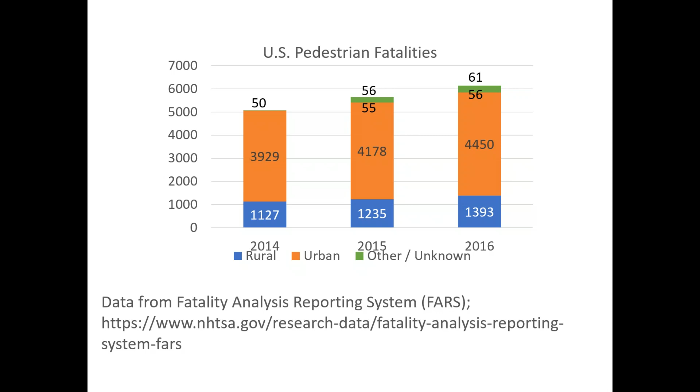Since 2014 — but first, before I get into that, let me show you a little bit more about the data. As I mentioned, it's a census of all fatal crashes. For pedestrians and bikes, typically they are at least one of the people killed in crashes that they're involved in with motor vehicles, so most often they're the most severely injured person.

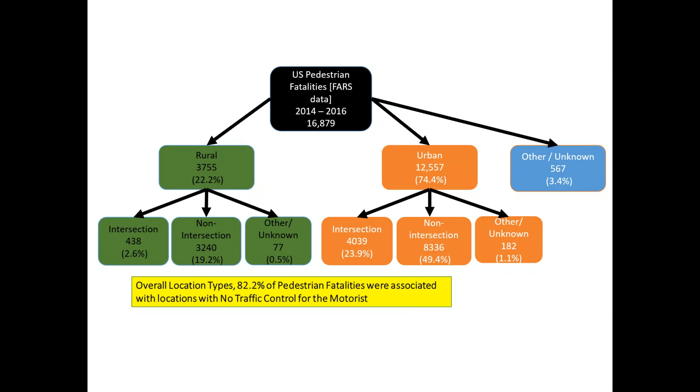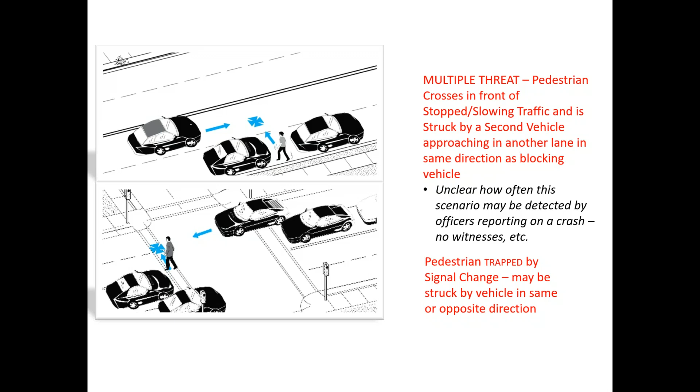For both of these, especially multiple threat, it's really unclear how often this scenario can be detected by the officers reporting on crashes, if there are no witnesses to what happened. Maybe it's at night, these hit and run situations. It's just unclear if this is being captured well in the data.

Other similar types with similar risks, especially at multi-lane crossings, are dart outs, which can also be from behind a parked car or other objects. That's very similar to a multiple threat situation, and it could also occur at a mid-block crossing, especially if parking hasn't been pulled back from that location.

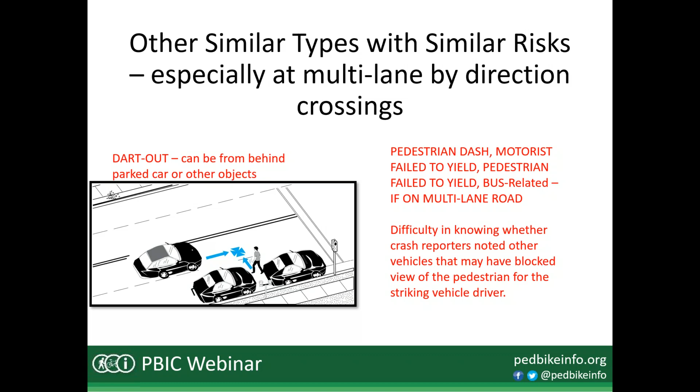Others are pedestrian dash, which implies that the pedestrian suddenly ran into the street. Motorists failed to yield, pedestrian failed to yield types - basically these are crossing path types of conflicts, even if we don't know who yielded right away or who didn't yield in all circumstances. Bus related crashes - a bus could set up a multiple threat situation if you have transit stops in a segment, and the view is blocked by the bus. So it's really rather difficult to know whether crash reporters are noting this situation where other vehicles may have blocked the view of the pedestrian for the striking vehicle driver.

So again, here's a summary of the data from the U.S. fatality data that we've been looking at. For all of those crossing types of crashes and all U.S. fatalities in general, we identified only 57 that the coders could clearly identify as a multiple threat type of crash, and only 14 for the trapped type of situation.

So with those caveats, the next table will show you some of the factors that we did look at in relation to multi-threat and other types.

Okay, so basically we took all of the crashes for the multiple threat and other crash types and looked at the relationship to a number of other factors. Now, I should say that the intersection ones are coded from the PBIC coders, and they determine that information from all the information available on the crash report - the image, the narrative, and so forth - as well as what the police officers said about the crash.

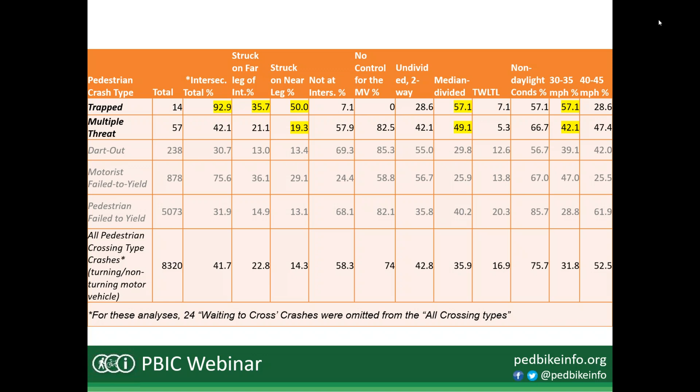One of the other issues we took a look at, the coders have been coding a more detailed scenario on which leg of an intersection crashes occurred on. Was it from the motorist perspective? Was it the near leg, the first leg they crossed, or the far leg as they went through the intersection? So we saw that multiple threat was a little more highly represented on the near leg, whereas trapped was more highly represented on the far leg. They were more likely to be struck in the far crosswalk as the motorist went through an intersection.

So just in summary, multiple threat and trapped crash types appear to be a low percentage of both fatalities and total crashes, although we know that North Carolina may not be representative of all states. It does have urban and rural areas that we looked at there. So it isn't known whether reporting issues affect the numbers.

Most multiple threat fatalities occur, though, at non-intersection locations. A lack of traffic control, I should have highlighted this in the table before, is overrepresented in multiple threat fatalities, even more so than for all crossing types of crashes. The median divided roads also seem overrepresented, as we mentioned. And again, better data on numbers of lanes and environmental circumstances might help us to better define this type of crash.

We didn't detect—although we know that light conditions, darkness or non-daylight conditions are really highly represented for pedestrian fatalities—this crash type in particular didn't seem to be overrepresented for nighttime crashes. So it may be that it is more of a situation where it occurs, and this is speculation, but it may occur more during congested hours, which tend to be more daylight conditions, because slowing traffic may be more inclined to stop and wait if they're waiting maybe to get to an intersection and make a right turn and such. But then the other lane is free flowing. Right, so it can be a dangerous situation. It's just that we're not sure how well we're capturing it in the data.

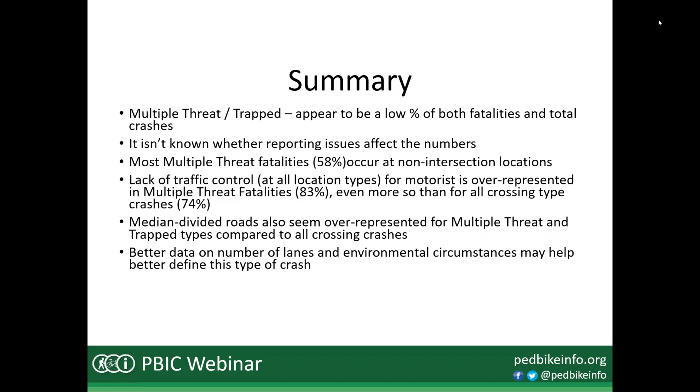So like you said, is it a problem with the reporting, or are the numbers just really low? I think we can clearly see some of the factors that may contribute to this crash based on what you just shared with us, and then what Mike Cynecki will be talking through in a bit. So let's move into Mike's presentation, and then we'll come back at the end for some more questions and explore this data issue a little further.

Mike, I'm going to start with your slides here, please take it right over, and I'll advance for you. Okay, my name is Mike Cynecki, as Dan had said earlier. In my 26 years with the City of Phoenix, the multiple threat crash was one of the most challenging to address, and it also involved some of the more severe crashes. Why don't you go to the next slide?

One of the reasons why you'll have multiple threat crashes occur is on streets. People like to live on low volume streets with very little traffic. But if you have a large community, you've got to find ways to move traffic around. Since most of the other streets are minor and discontinuous, you'll have these big major streets that are multi-lane, where a lot of the traffic has to move, and that's where our crashes are occurring.

I agree with what Dan had said earlier: a lot of the multiple threat nature of the crash is not getting captured, recorded, or computerized. You have to read the report to understand how the crash is happening, or look at some of the details. In some cases, the details are not provided, so you can't really tell what's happening. But I'm going to speak about 5 factors associated with multiple threat crashes.

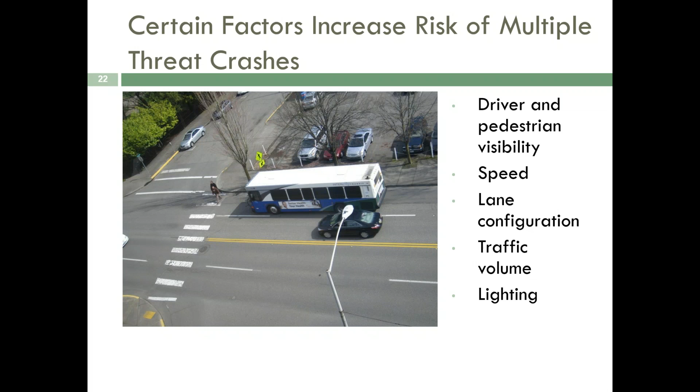One is driver and pedestrian visibility. The second is speed. Third is lane configuration, and the number of lanes is very important, associated with traffic volume, which is the opportunity for a multiple threat crash. And then, how lighting may impact that. Go ahead, Dan, next slide.

The multiple threat crash problem occurs, as this slide shows, when a vehicle stops at a crosswalk and creates a visual screen for the car in the adjacent lane. It doesn't have to be the curb lane; the pedestrian could be crossing the other direction. In many cases, the driver of the vehicle approaching from behind doesn't understand why the motorist is stopping and will pass them, even though, as we'll discuss in a few minutes, it's against the law to do so. It could be a motorist in an adjacent lane or one behind the stopping motorist who goes around them. They have no idea what's there.

The pedestrian similarly could have a visual screen. However, we have always tried to tell pedestrians that they have a blocker, so crossing one lane at a time is a way for them to overcome the situation. But many times, psychologically, when they see one vehicle stop, they feel everyone is stopping. And in many cases, drivers out there have a lot of distractions. It's not good - drivers are talking on cell phones, talking to each other in the vehicles, looking at maps trying to find their way around. They don't have their mind on what's going on.

Go to the next slide.

This shows an excerpt from the Uniform Vehicle Code 11-502, which says whenever any vehicle is stopped at a marked crosswalk or at any unmarked crosswalk at an intersection to permit a pedestrian to cross the roadway, the driver of any other vehicle approaching from the rear shall not overtake and pass such stopped vehicle. Everywhere I've gone, state laws have that provision regarding right-of-way at crosswalks. Wording may differ slightly, but virtually every state prohibits a motorist from passing a vehicle stopped at a crosswalk.

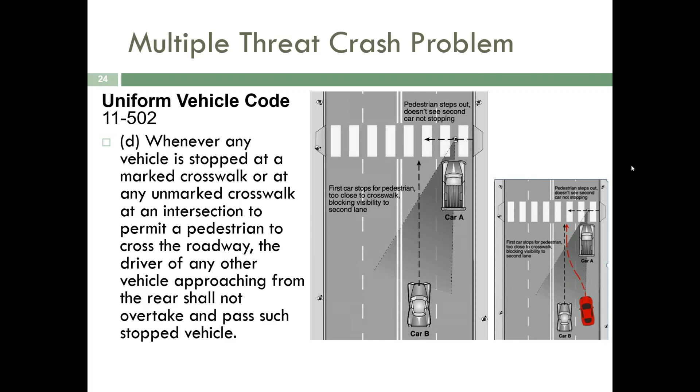So what are some of the problems of multiple threat? Not only could it be from a stopped vehicle, it could be from a parked vehicle. In this case, the pedestrian standing at the curb would not have a good view of oncoming traffic. Solutions can include putting in curb bulb-outs so the pedestrian is standing in a secure spot where they can see beyond that parked traffic. So the multiple threat can be traffic stopped in the street or traffic parked along the roadway, and we have to look for those locations to make sure pedestrians have good visibility and traffic has a better opportunity to see them.

In some cases, the visibility issue is referred to as providing daylighting or open visibility. One thing I want to point out is that a bike lane can provide a lot of benefits, not only space for bicyclists, but also separation that helps promote better visibility for drivers and pedestrians waiting to cross. Also note that visibility problems can come from a median island - if you're planting big trees along the street or in the median. We had a case years ago involving a skateboarder going through a median with a big ocotillo plant that, during certain times of year, leafs out and you cannot see beyond it. Our solution was to relocate that ocotillo to a spot where it wasn't creating a visibility obstruction. So plants along the roadway intended to do good, as well as parking, can create this problem where you don't have the clear view between the approaching driver and a pedestrian waiting to cross - and it's not just at crosswalks, it could be anywhere along the street.

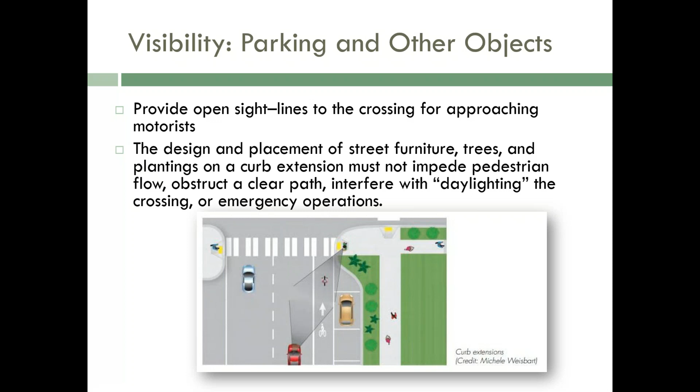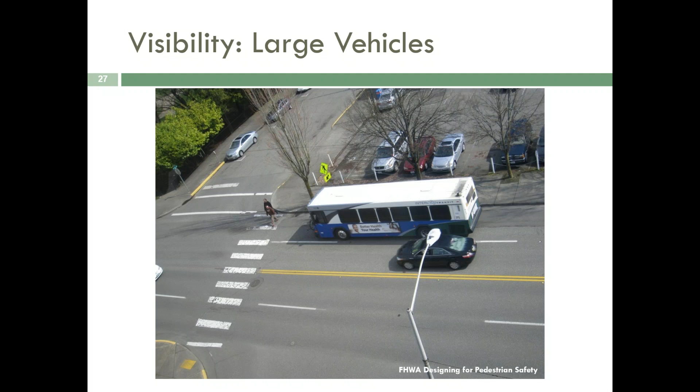Visibility obstructions also occur with larger vehicles, trucks or buses along the road. Again, the pedestrian has a great blocker there that lets them cross one lane at a time, but it creates a really difficult visual screen for the motorist approaching in the other moving lane.

Here's a case where you can look at it from the pedestrian's perspective - once again, the pedestrian cannot see beyond the bus. Buses really shouldn't be stopping on the approach to uncontrolled crosswalks; they should be far side, but there may be reasons you can't, because of ADA access or because the bus is turning the corner. In most cases, buses create such a visual screen that they should be put on the far side of intersections. And once again, there's that psychological condition where the pedestrian presumes all the other motorists see them and will stop for them, and that typically doesn't happen.

Another case happens when a bus passenger wants to catch a connecting bus or is in a hurry - they may jump off the bus and quickly go into the street in front of the bus, where the driver doesn't have a chance to see them.

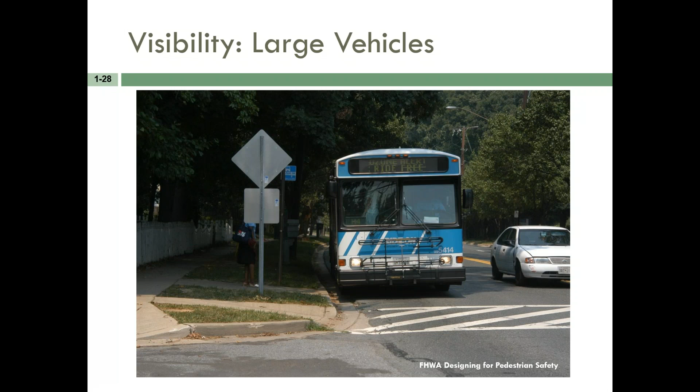Another issue is that our multiple-threat crashes typically occur on our higher speed streets. We have a lot of 40, 45 mile an hour streets within the city limits, and those conditions are more ripe for higher impact speeds and a higher difficulty to avoid a crash.

When we talk about speed, we're going to be talking about a couple of different things. First, the ability for drivers and pedestrians to see each other, the ability for the driver to react and avoid a crash, and speed's major impact on crash severity.

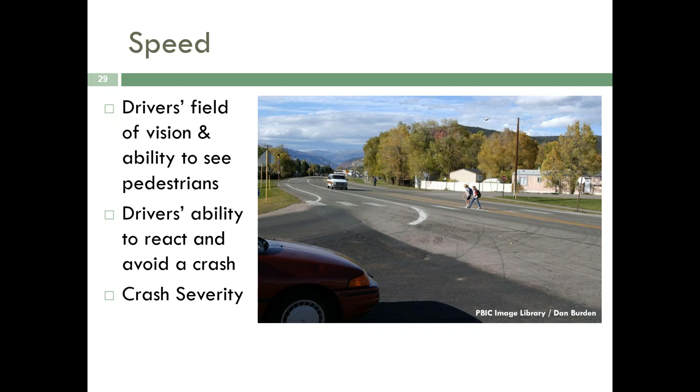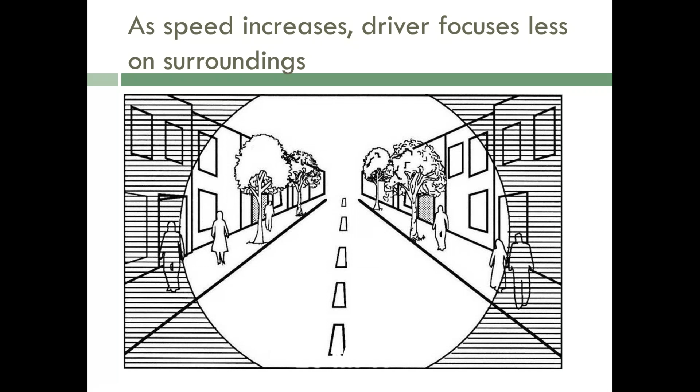As the speed increases to 25, you're looking even further down, and of course at 30 miles an hour. Imagine streets going 35 or 40 miles an hour—you're not seeing the periphery, you're looking far ahead because you have to react, and it takes a much longer distance to react to conditions down the street. So the driver's cone of vision and where they're expecting issues to occur is further down the road, not to the right and left as pedestrians cross.

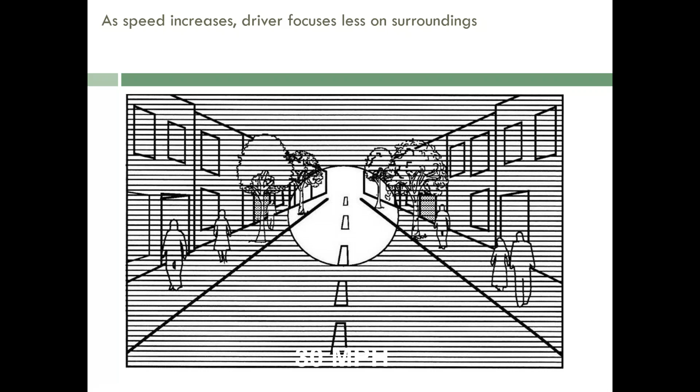This is a chart we use in the Designing for Pedestrian Safety courses, showing how speed affects crash avoidance and your ability to stop. At 40 miles an hour, the distance it takes to perceive, react, brake, and bring your vehicle to a stop is almost a city block. That's a long time, and we have our greatest difficulty warning drivers for crash avoidance on higher speed streets because it takes so much distance to bring that vehicle to a stop. Even on a 20 mile an hour street, you're looking at 100 feet to react and avoid a crash.

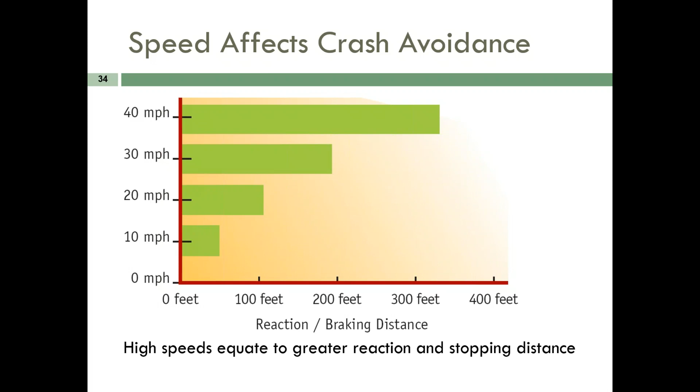So that is one major issue.

The other major issue is what happens when you have an impact at various speeds. This slide indicates the impact speed and the chance for a fatality. This is for an average pedestrian—if you have an elderly pedestrian, the chance for a fatality is far greater. And what this figure doesn't show is that those who survive the crash may have long-lasting and severe injuries for the rest of their lives. So one way we can minimize the chance for a fatality or severe injury is to get vehicles to go slower and slower.

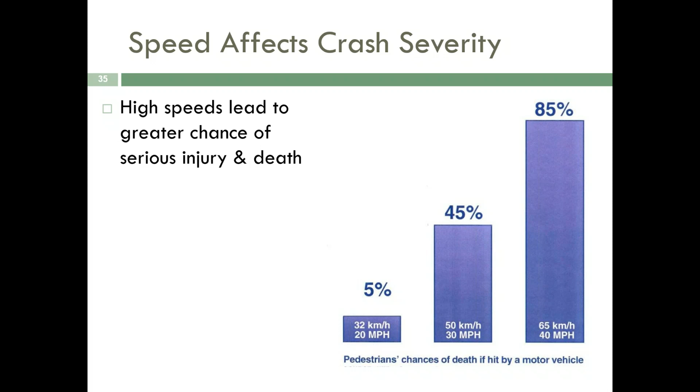Much easier said than done.

We also have long crossing distances, which create challenges especially for younger or elderly pedestrians: a longer exposure to traffic, greater conflicts, and greater vehicle delay. That's because at traffic signals with big wide intersections, people are always trying to add dual left turns or right turn lanes. These big intersections often have their clearance times dictated by signal timing based on pedestrian clearances, meaning longer cycle lengths and greater vehicle delay. And of course slower pedestrians need much more time to cross the street.

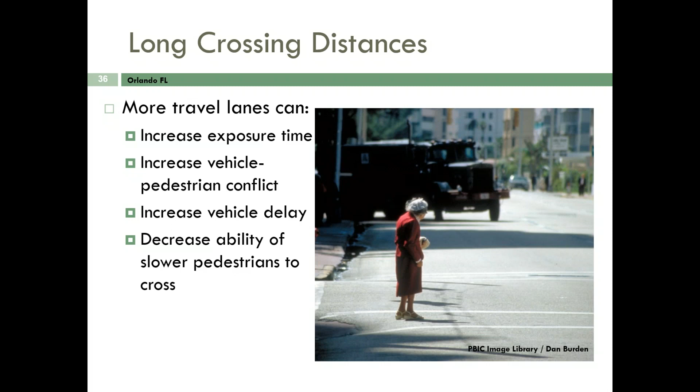Again, when you take a look at streets like these and add traffic volume, you add the opportunity for crashes. I remember when Charlie did his big study on marked and unmarked crosswalks—he called me, and I won't mention the agency I used to work for, but he said that particular location had the highest number of crashes.

That location had 4 lanes in one direction, 3 in the other, and a center two-way left turn lane, 84 foot from curb face to curb face, and a marked crosswalk. On one side of the street we had an apartment complex. The other side had a daycare center and a grocery store.

Since then we've gone back, reduced a lane, and done some other crossing treatments to make it much easier to cross. But that was one of those types of conditions that really shouldn't have just gotten a marked crosswalk expecting that to resolve your pedestrian safety issues.

The wider the streets like this and the more traffic you add, the more opportunity for crashes. The other thing to mention is traffic congestion: drivers who are frustrated because they're caught in congestion, or caught at 3 cycles at the last signal, are less apt and likely to stop. So the more congestion you create, the less likely they are to want to stop mid-block or at other locations along the route.

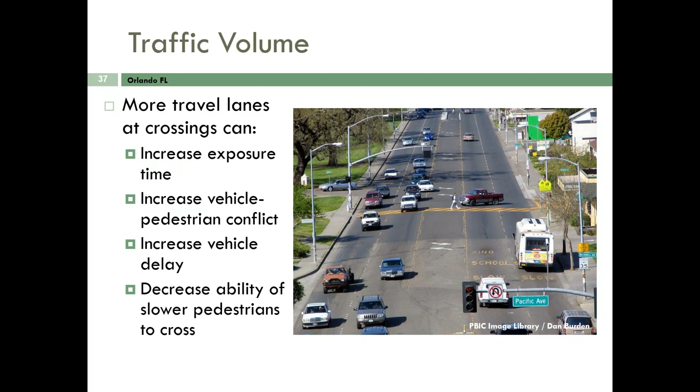Go ahead to the next slide.

Another factor is illumination for nighttime crossings. When you designate your crossings, make sure you have lights there, because lights really help light it up. We've had situations where crosswalks were put right in between lights along a continuously lit route—that would be the darkest spot. You want people to cross at the lightest spot, and that has a big crash reduction factor.

Now, the crash reduction factors listed here are just for those crossing at night—it's not your total crashes, but your nighttime crashes. You'll see a disproportionate amount of pedestrian crashes occur during the nighttime hours. Next slide.

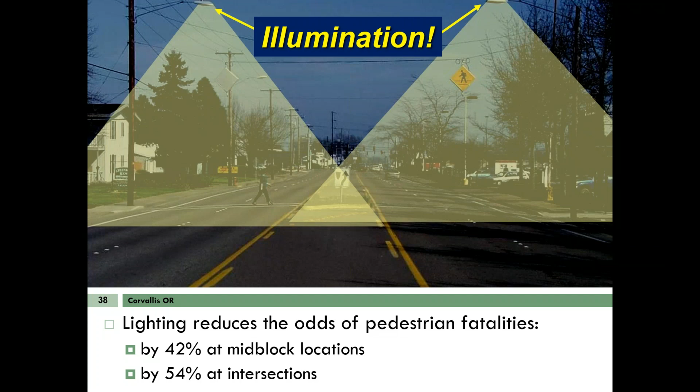I believe this is my last slide. The one other thing about lighting: the old way of doing it, in this mid-block example, was just putting it on one side of the street. The better way is to try to put lights on both sides so you have uniform lighting, and put the light in advance of the crosswalk—it doesn't have to be far in advance, 10, 15 foot in advance.

As opposed to having the light above the pedestrian, which creates a silhouette effect, when you have it in advance of the crosswalk you're lighting the pedestrian, you can see colors better, and as a result you can recognize things better. About 20 lux, or 2 vertical foot candles, at about 5 foot above the pavement, is the desirable lighting level for your crossings.

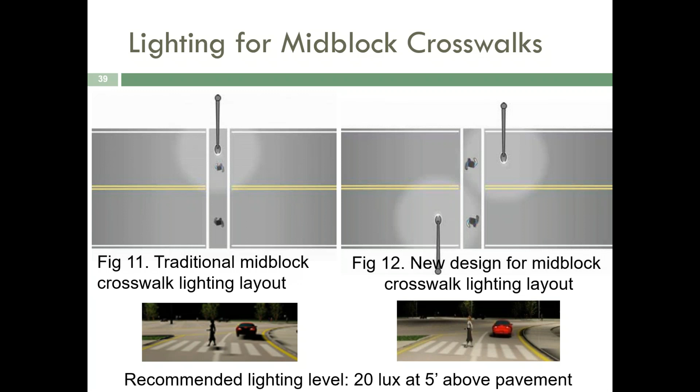This is a simple 2-lane crossing example. Just imagine for a wider street where you want to get the lights out over the roadway and slightly in advance. I believe that's all the slides I have, and we're going to move on to Charlie to talk about some of the solutions for the multi-lane crossings.

Great, thanks so much, Mike. That was an awesome review of all these different factors that could be contributing to this problem. I'm sitting across the table from Charlie Zegeer right now, and as you mentioned at the outset, you've had some history with Charlie on this topic.

Charlie's devoted a lot of his career to understanding and improving safety at uncontrolled crossings. So Charlie and I are going to go back and forth through a few strategies that we see as some of the things we could be doing better at uncontrolled crossings. We'll finish with recommendations on how to know which options belong where, sharing more recent guidance, and then wrap it up. Then we'll move on and George Branyan will share some perspective from DC.

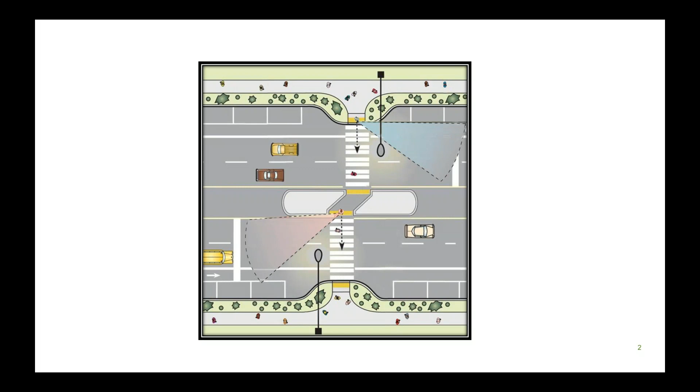Compared to some of the images Mike just shared, we've got a pretty nice looking scenario, all things considered, for a multi-lane crossing here, compared with other locations without these treatments. The question is: what does this crossing have that those other locations didn't? You can identify a few things—efforts to put the pedestrian in a better visible position, shorten the crossing with things like bulb outs, and medians and protected refuge areas to help break up longer crossings.

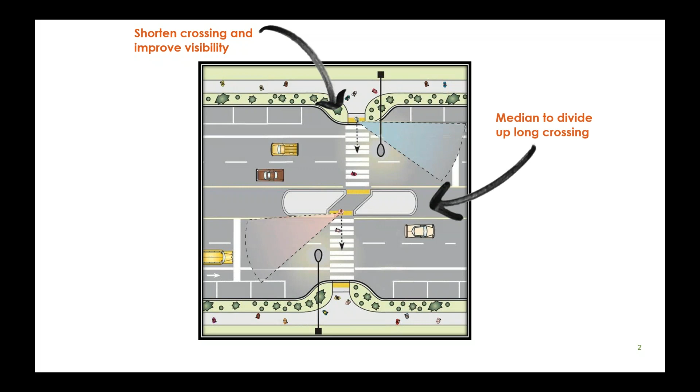These advanced lines, stop lines, yield lines, get drivers to stop further back from the crosswalk, as well as any additional lighting signals, beacons, things that you can do to really reinforce yielding behavior.

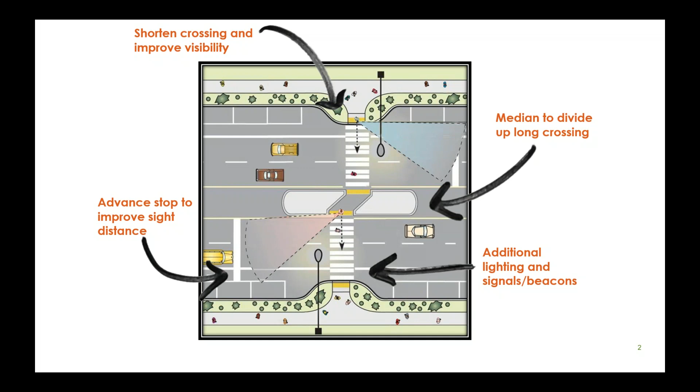We're going to talk about all of these today in a couple of different categories. Some of them intended to really address visibility and conspicuity issues that Mike raised, others to really reinforce safety by improving yielding rates at crosswalks.

We're going to try to accomplish several objectives to get at some of the causes of the crashes. In fact, when you often look at pedestrian crash reports, it's not uncommon to see that the driver involved, when asked why they hit the pedestrian, will say the pedestrian came out of nowhere. Oftentimes that just means the driver didn't see the pedestrian until the last minute, so that might be a clue that it was a multiple threat crash.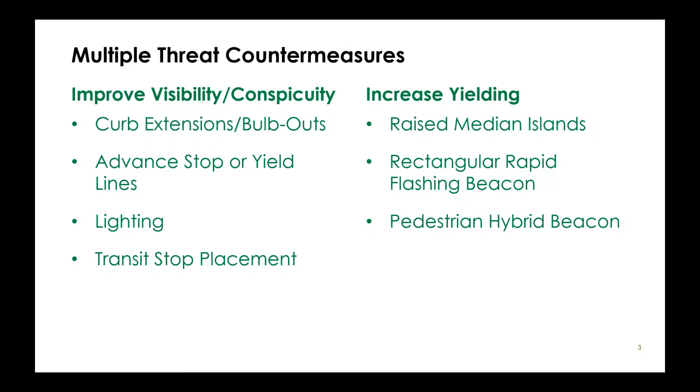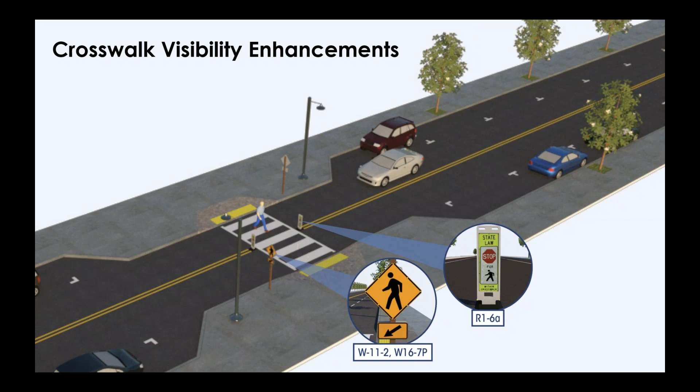Great point. There's this package of crosswalk visibility enhancements, Charlie, that you promote. This is from the STEP, Safe Transportation for Every Pedestrian Guide, which we'll get into in a minute. Some of the things packaged here in visibility enhancements, one of those being this curb extension or bulb out.

Mike Zanecki shared this slide, but what you're doing here is really putting that pedestrian in a more visible position, opening up those sight lines so the pedestrian can see oncoming traffic and can be seen.

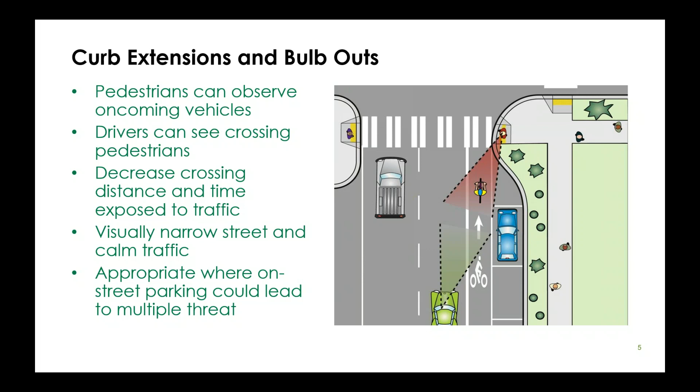Having a curb extension or bulb out can also reduce the speed of the right turning vehicle. So if a pedestrian is crossing from the bottom to the top of the screen here, that green vehicle making a right turn will more than likely make it at a much slower speed, increasing the pedestrian's chance of being seen and not struck.

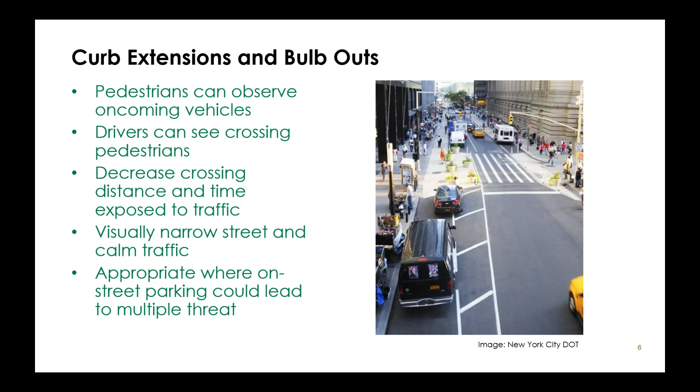This is really more realistic in locations with on-street parking. Obviously, you can't extend these into a full lane, but it reminds us that on-street parking can contribute to the multiple threat case. It's not just a vehicle that stops or yields, it could be any obstruction there, so putting pedestrians into a more visible place.

I think dwelling on advanced stop and yield lines as a countermeasure is really important because, as we'll see, depending on the money you're investing in this treatment, the benefit you get is pretty substantial. So we can explore what that does.

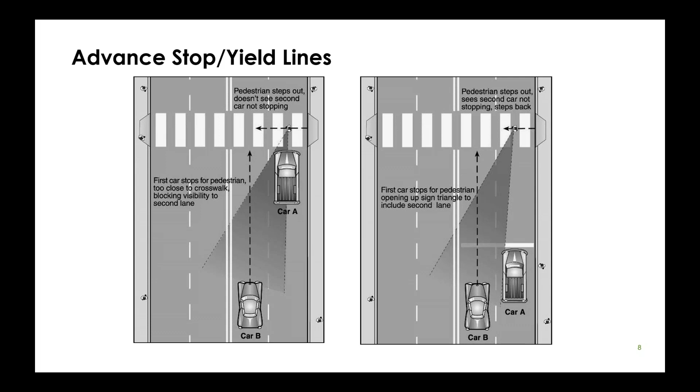There's guidance available out there depending on the speed and the lane configuration for how far back from the crosswalk you should place these, and some states are stop states and some are yield states, which depends on the marking and signage. But bottom line, by pulling people far enough back from the crossing, it'll open up visibility a bit more. For higher speed approaches in particular, you may want to place the stop line or yield line more like 50 feet back, and as speeds get lower, you can inch closer to the 20-foot distance. That's a factor, along with the number of lanes.

So you want to consider this advanced stop or yield marking with all of your established marked crosswalks, but then go out and observe. After you've installed a designated crossing with some of these supplemental treatments, make sure you're observing what's going on and that it is functioning properly.

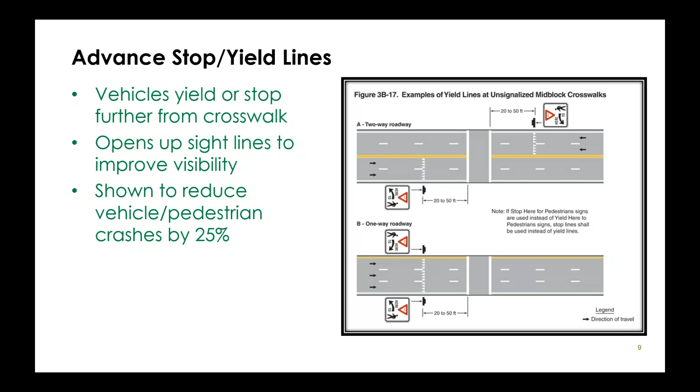The thing that jumps out to me is the 25% reduction based on research in pedestrian crashes that can occur after these go in, and that's even without another accompanying treatment. Obviously more successful if there's something else done as well, but that's a pretty good reduction, and for a fairly low cost compared to something like the RRFB or the pedestrian hybrid beacon.

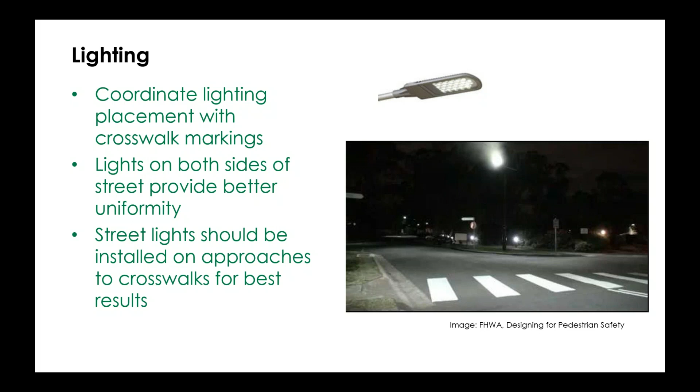Lighting, Mike mentioned this. We won't go into too much detail, but it's important. If we're talking about multi-lane corridors, great distances from one side of the street to the other, and if you've only got lighting on one side of the road, that'll be insufficient for illuminating the entirety of the crosswalk on both sides. Thinking through placing the lighting, coordinating with the crosswalk locations, as opposed to just placing them at set intervals - when that coordination isn't done, you're not always going to have lighting where you need it, at the crosswalk locations. We realize that agencies don't have unlimited funds, but certainly where you're having pedestrian crashes and or complaints occurring at night, these are the highest priority crossing locations to consider overhead lighting.

Mike, I might bring you back in right here. We did get a question about lighting that I wonder if you can answer for us, and that's what preference do we have in terms of the type of lighting for using at crosswalks? For example, an LED or some other type. Is there sort of clear and set guidance on this?

The preference is for LED lighting, for a couple of reasons. First of all, if you get the whiter light - it's actually a blue light that they refer to, but it looks whiter - you can recognize colors better, and the better you recognize colors, the more you can see what's out there, a pedestrian or anything else. If you have high pressure sodium along the street, putting your LEDs at your crossing points might be one solution. But putting in all LEDs is primarily due to the lighting efficiency and the maintenance efficiency. I've had people tell me from state DOTs that the real savings is in the maintenance - you don't have to go out there for a much longer period of time to replace the bulbs. They last that much longer.

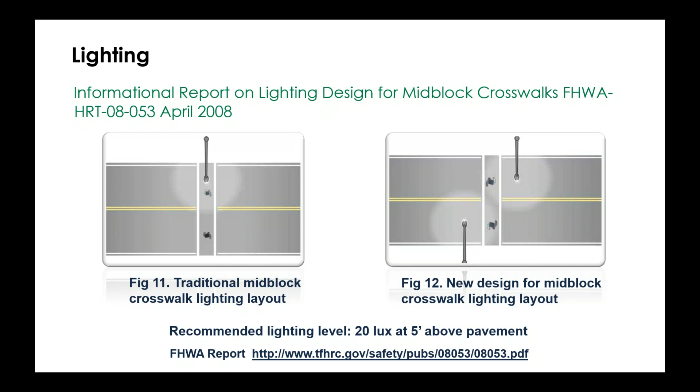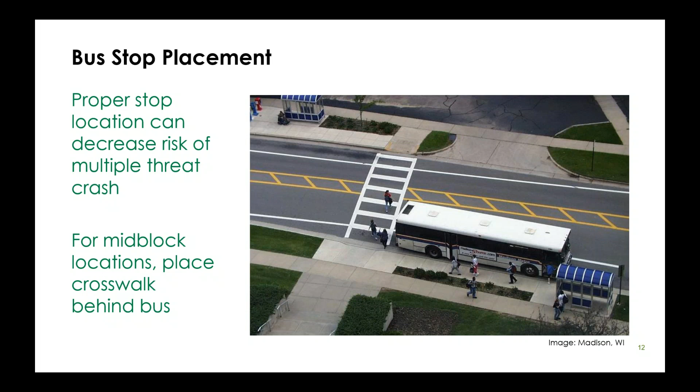We're going to talk about some of the other different countermeasure options in just a minute. One of the main ones to keep in mind for every designated pedestrian crossing is to make sure that the advance or approach to that crosswalk is clear - you don't want to have parked cars. In fact, in Europe, some countries have a special marking that they put on the advance of a crosswalk, meaning you better not stop and park here or you're in major trouble.

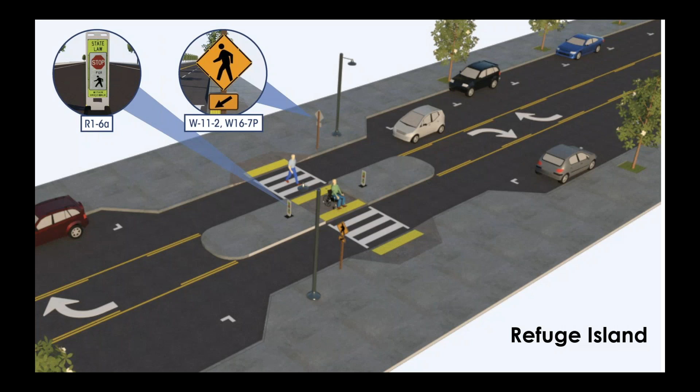The refuge island is another treatment. You can add some more protection to pedestrians, give them a little bit more visibility, adding a pedestrian refuge island, breaking up that crossing distance. We're seeing benefit here in reduced crashes - a 32% reduction in pedestrian vehicle crashes by putting in a raised median island. On multi-lane roads, based on our recent research for NCHRP, it's pretty clear that if you can somehow put in a raised median island, that can be one of the most effective treatments, particularly in combination with things like advance stop lines and markings and signing. So that's a good kind of treatment to use in conjunction with some of these others.

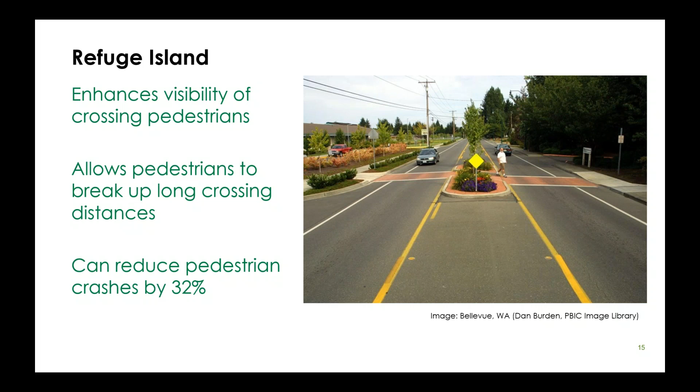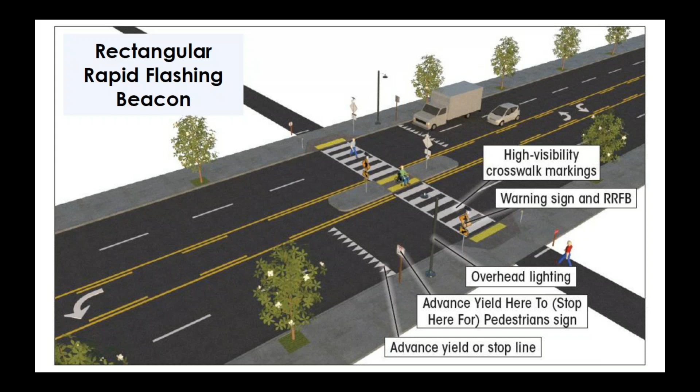We'll keep moving and offer a couple of ideas on two other systems: the rectangular rapid flashing beacon as well as the pedestrian hybrid beacon. Those are two things that are often talked about in the same conversation. The rectangular rapid flashing beacon is a push button operated system - that stutter flash, a set of warning lights that really draw drivers' attention to the fact that a pedestrian is crossing at a location.

They're less expensive than the pedestrian hybrid beacon we mentioned, and can still have a pretty good benefit for pedestrians, reducing pedestrian crashes by 47%.

When we did the research a few years ago, many of these RRFB installations started in St. Petersburg, Florida, and now they're being used in different cities around the country, though not in great numbers yet.

There's been some suspension of the approvals for RRFB from Federal Highway until recently. Now that it's back on the tentative approval list, you still have to apply for permission to experiment with it, but Federal Highway is granting those applications pretty easily.

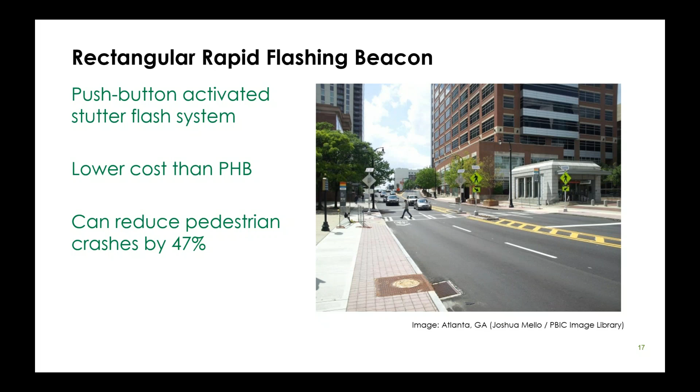It is something to keep an eye on, because while these may be useful, particularly on multi-lane roads, there's still some question about whether they're adequate on the really higher speed, higher volume multi-lane roads—that's where the pedestrian hybrid beacon comes in.

Let's talk about the pedestrian hybrid beacon too. It's a different kind of system that operates in a similar way. However, you're going to see a flashing wigwag pattern with the light system. It's dark when no one's using it, but once activated, it eventually brings drivers to a full stop, adding a little more protection on those high-speed, high-volume corridors.

Most of the systems, whether RRFB or pedestrian hybrid beacon, being used in the U.S. now—most, not all—have other supplemental treatments like high visibility crosswalks, advanced stop or yield markings and signing. Many also have raised median islands. That combination of treatments, along with nighttime lighting, is really one of the things we want to look at, since it gives motorists and pedestrians a better chance of doing the right thing.

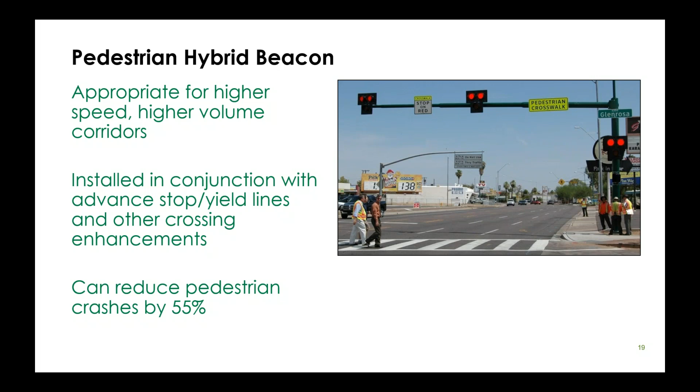The question a lot of people have is: if you know about the countermeasures and can find information about them, how do you know which one to use, where, and under what conditions? This gets into not only the multiple threat crash but improving safety at all of these uncontrolled crossings. And Charlie, that's where the Safe Transportation for Every Pedestrian guidance comes in—that's something you've been working on lately.

This is a project that HSRC worked on. We were a subcontractor to VHB, overall for Federal Highway Administration. We just have an update of this guide that's going to be made available soon. Lauren Blackburn tells me any day we might expect that to be available—Dan, maybe we can send that link out to some folks.

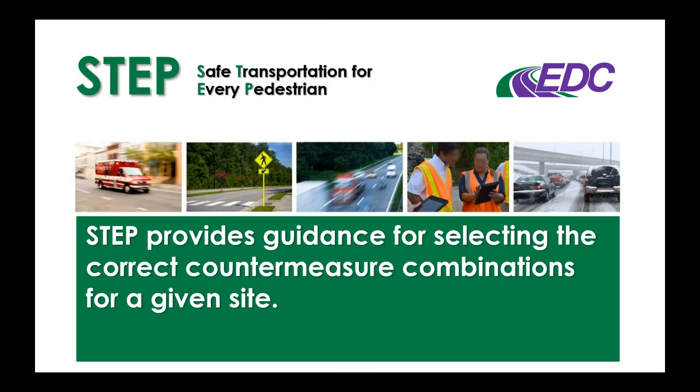The intent of the countermeasure selection part of this—many of you may be familiar with the study we did in 2005—basically looked at the safety effects of marked versus unmarked crosswalks. The bottom line is there are many situations, particularly multi-lane, higher volume, more than about 12 to 15,000 vehicles a day, more than 3 or 4 lanes.

That combination means you need to be careful not to just use paint alone. These are situations where you need something more substantial. So if you're going to designate a pedestrian crossing, you need to look at other potential treatment combinations to make sure you're not making things worse—you're going to do no harm. This is where the 2018 STEP guide comes in.

It takes into account different combinations of crosswalk visibility enhancements, raised crossings, pedestrian refuge islands, pedestrian hybrid beacons, and road diets, generally going from 4 lanes to 3, sometimes 5 lanes to 3. Now that we have recent permission from Federal Highway to also consider the RRFB, we have this package of treatment possibilities, and we put them all together in what we call Table 1.

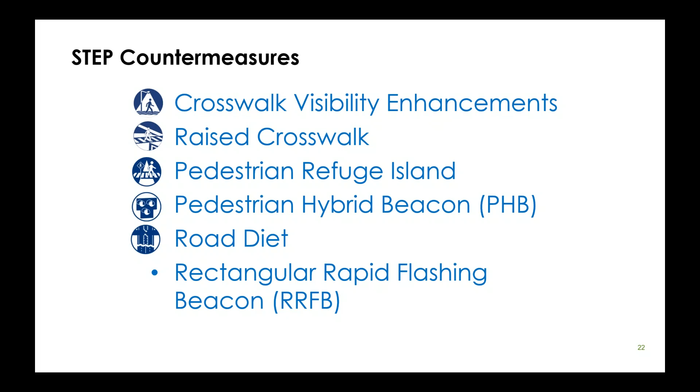Let me give you a quick overview of the STEP guide. It's really a 6-step process about how you should go about collecting your system-wide data and identifying crossings that need to be considered for treatment, and how you go about selecting the right treatments and following up, etcetera. This resource has several different components.

It has a fact sheet, a detailed sheet on each of the countermeasures. It has what we call the tech sheets that give a lot of the technical information, kind of a guidebook on how you go about improving uncontrolled crossings. And then there are different things like the pocket version, and we have graphics to go along with it.

Libby Thomas did a really good synthesis of current practice, not only of the research that's been done on different crossing treatments, but of what agencies are doing. I think she got 40 different states and a couple dozen local agencies, and got input from them on how they were making choices on pedestrian treatments and what they were using in different situations.

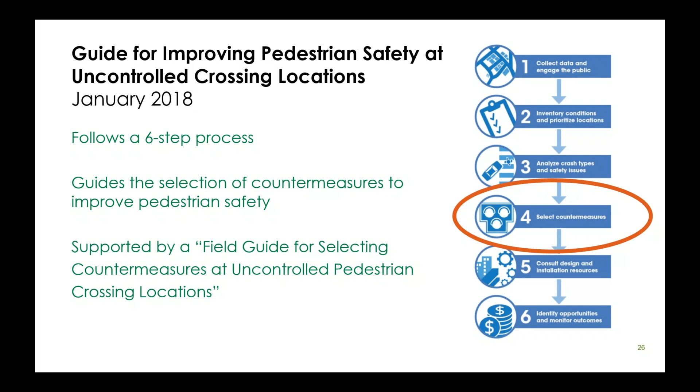So what we're going to do is just mention one of the steps of the 6-step process, and we're going to focus on what the decision points are. Now there is a field guide that goes along with this that helps you go through a step-by-step process. We're not going to get into that now, but we'll ask you to go to the Federal Highway website, click on it, and you can see all these resources.

So here is Table 1, which sort of takes over where the 2005 research study left off. The question is: if you're going to designate a pedestrian crossing—now we realize that on many of your low-speed local streets, low-volume 2-lane roads, you really don't need any treatment. You don't need to mark a crossing at every single intersection in your city. Many of them have had no crashes in years, and they seem to be operating safely.

But what we're talking about is where you choose to designate a pedestrian crossing, particularly on your 3, 4, 5, 6 lane roadways, where traffic volumes and/or speeds are high, and pedestrians need to get across the road. On the left side of this chart, we have the different options: 2-lane, 3-lane with raised median, 3-lane without a median, 4-lane with a median, and 4-lane without a median. Across the top, you have different categories of average annual daily traffic: less than 9,000, 9 to 15,000, and greater than 15,000.

These categories agreed with and were consistent with the 2005 study in terms of where the breakpoints are with pedestrian crash risk and where you need more substantial treatments to address those. You also see 3 speed limit categories. So in each of the matrix cells, we have numbers from 1 through 9, where a 1 is a combination of high-vis crosswalks, parking restrictions, overhead nighttime lighting, and supplemental signing. Those are all incorporated into option 1.

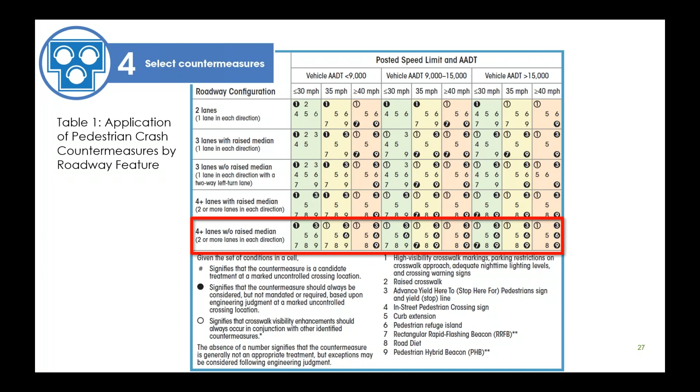For each of these numbers, you may see some with a dark circle around them, which means for that situation you really need to strongly consider this treatment, whatever the number is. We also have a blank circle around some of the number 1s, and in these cells that means, where you have this situation, don't put in just a marked crosswalk alone, because if you do that, you could actually be making things worse for pedestrians.

So Dan clicked on a combination of a 4 or more lane road without a raised median, which is the bottom row, combined with the column that says greater than 15,000 vehicles a day, combined with a 40, 45, 50 mile an hour speed limit. That leads you to an overlap cell that has 6 numbers in it. 3 of the numbers—3, 6, and 9, the advanced warning, the pedestrian refuge island, and the pedestrian hybrid beacon—are in dark circles, meaning you really need to strongly consider one or all of these treatments.

Number 1 circle says don't just do a marked crosswalk alone here. Number 5 and 8, curb extension and a road diet, well, these are possibilities, but you really need to meet certain criteria, or there are options to consider. I think it's a nice way, Charlie, to think through all the options and how they might fit together. This is coming from that FHWA Safe Transportation for Every Pedestrian guide, which we'll provide the link to again in just a second.

It gets at what are those highest risk conditions and what can you do to improve them. Not just take out the crosswalks or don't do the crosswalks on the high speed, but do all these things to make sure that it's safe when you have them.

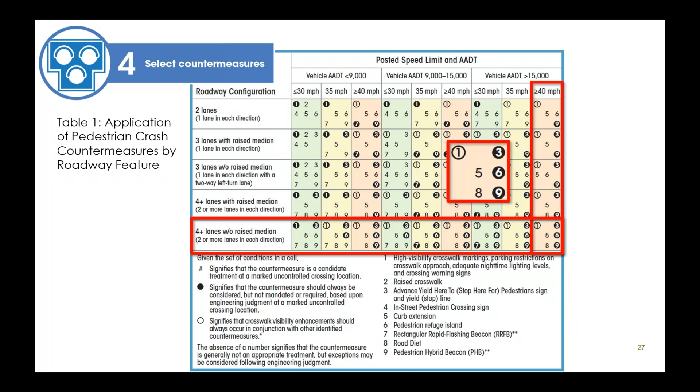This is another table that you wanted to talk to as well, I think. Right, and so once you've identified what are your treatment options for a designated crossing, it really helps to know what particular at that crossing is going wrong. Are the speeds too high? Are there conflicts? Are the drivers not yielding? Is there insufficient separation? So you can look at this secondary chart and help guide you to sort of which of these 5 or 6 treatment options may be more appropriate.

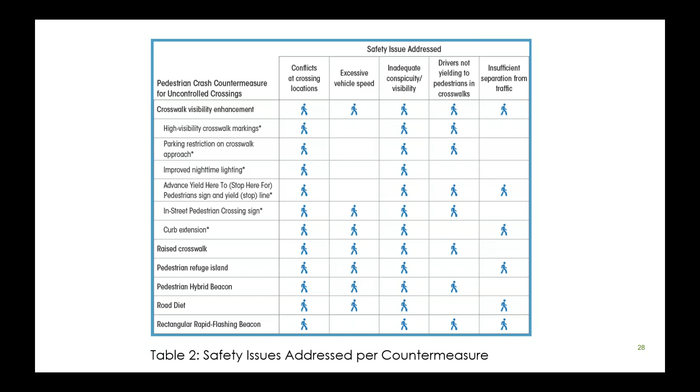And obviously, this guide is intended to only give you some options, and you really need to follow up with going out and observing the site, watching traffic and pedestrian interactions, looking at the geometrics, and trying to decide why pedestrians are behaving this way, or why are motorists not yielding, and really making a decision on the cause of the conflict or what crashes you had, and then have that lead you to the right solution.

Yeah, absolutely. And so here again, the slide, I just sent the link out. Check the step guidance out. It is really a nice way to wrap up not only the countermeasures and strategies we shared earlier, but how they really all fit together, and a good way to think about sites. I didn't want to leave off without mentioning the role of behavioral campaigns as well.

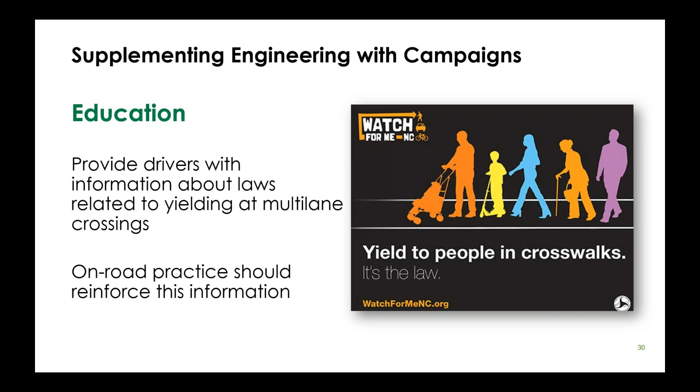I mean, we're focusing a lot on design here, but there is a role for education. And I think sometimes we shy away from those simple sort of awareness raising kind of campaigns, but we can look at things that are more substantial even than, you can remind people of what the laws in the crosswalks are, but also getting at things like driver training and driver education.

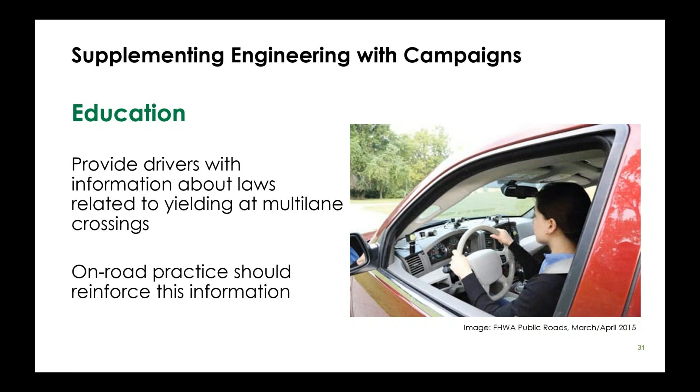Such a huge opportunity to integrate what Mike talked about with the specific laws and rules of the road, integrating that into driver training and then on the road practice for drivers, for new drivers, getting them into conditions where crosswalks may be uncontrolled and how they behave around pedestrians. I think that that's a really critical opportunity that we can take advantage of.

Obviously, enforcement plays a role as well. Enforcing laws related to yielding is possible through these high visibility enforcement tactics and strategies that NHTSA has laid out and some guidance for us, and even monitoring some of those items that are particularly relevant for multiple threat crashes, like the motorist passing or not yielding when one other vehicle has. So some things to be thinking about. Maybe we can get into some more of the behavioral element of these in the discussion period.

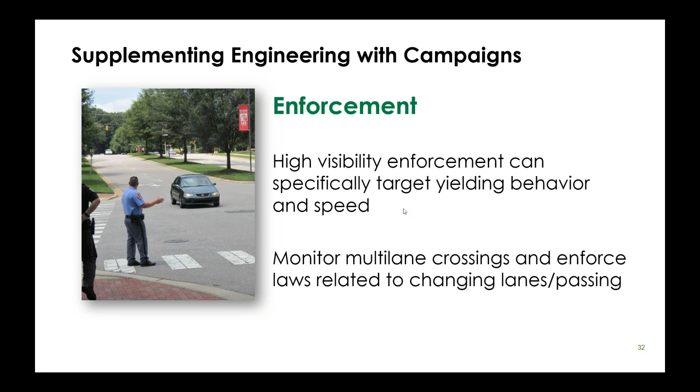I wanted, as we shift toward the close of our strategies, it's also always really useful to see how these are put into practice by agencies around the country. And that's why we're so glad that George Branyan is here joining us from DDOT to really tell us how does this look on the ground and what has the experience been in Washington, D.C. when trying to work on this problem.

So George, I can see your slide now. Please go ahead whenever you're ready. We're excited for this. Very good.

Yeah, thank you, Dan. It's a pleasure to be here with such a great group of experts in both research and practice. So take a couple minutes to talk about sort of how we're looking at multi-threat ped crashes and countermeasures and problem ID in Washington, D.C.

I guess consistent with what Libby was saying earlier is it doesn't seem to be showing up very much in the data. First off, there's no field on the police crash report for a multi-threat pedestrian crash. And then we tried to get around that just recently. We're in the midst of a research project by Morgan State University researchers from Baltimore, and they're looking at 3 years of ped crashes, about 3,000 crashes, and only 20, after reading through the narrative that the police wrote, could they determine that they were multi-threat type.

When I looked at crash type and pedestrian action crosstabs, most appear to be the dart-out from between parked cars. Only 3 or 4 were even at an intersection per the police report, which seems off from my gut sense when I'm out on the streets looking at crashes and complaints, which point to a lot of problems at marked crosswalks at many locations. So there may be a lot of near misses that are never reported.

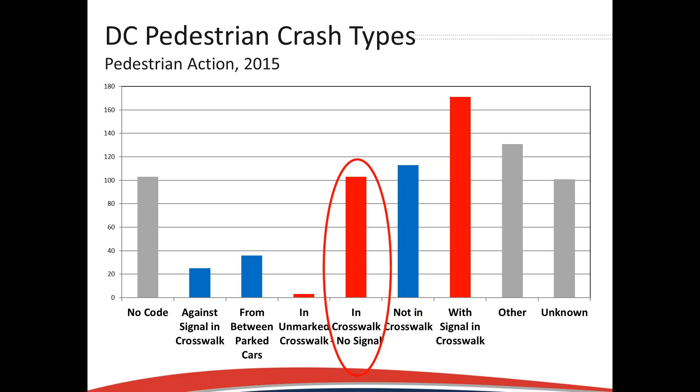So the potential is there for more, but we're still looking into that. As for severity, which was brought up earlier, that's where the potential is. The red boxes show crashes happening in a crosswalk with no signal—about 103 of them in 2015, 1 fatality and 8 disabling.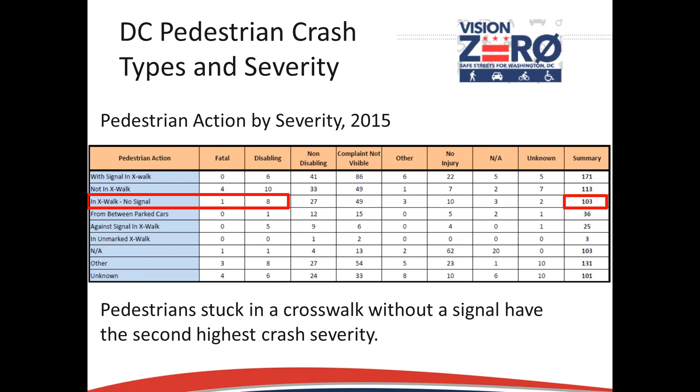So the probability of a more severe injury at a crosswalk with no signal, whether it's a multi-threat or not, is one that concerns us, especially as a Vision Zero jurisdiction trying to push down fatal and severe injury crashes. When they do happen, they tend to be pretty dramatic.

This is from 2015, when a nurse was crossing this crosswalk on Wisconsin Avenue, and one driver stopped while another driver went by and hit that Jaguar. The dark Jaguar is the car that struck the young man, and he died a couple days later. There's now a HAWK signal at that location.

Again, it's unfortunately an example of a crosswalk—we have way too many of them—where the potential for these types of crashes is very high. This is what was done afterward.

We put a PED hybrid beacon in there, and this also shows an advanced stop line treatment that we do for PED hybrid beacons, which isn't exactly the same kind of crash, but it potentially is.

The thinking we came up with is that when the flashing red phase is activated at a PED hybrid beacon, drivers may move forward if it's safe, but sometimes pedestrians see the countdown with 7 or 8 seconds left and think, I want to get to the other side, so they may rush or even run into the crosswalk. I don't want someone in a vehicle in one of the 2 or 3 lanes to advance without being able to see the crosswalk as fully as possible.

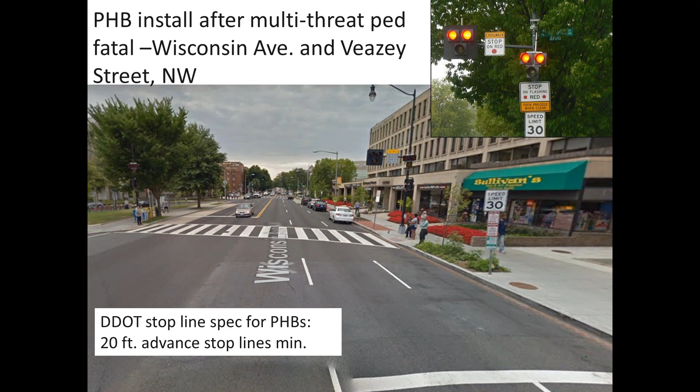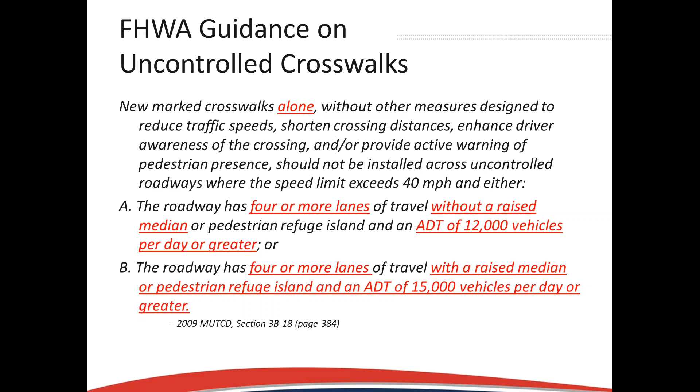The federal highway guidance in the MUTCD is very clear that you never should use marked crosswalks alone. This is basically Charlie Zegeer's seminal study from 2005, which got into the 2009 manual, and we used that to set up our policy.

This is the matrix that came out of Charlie's study, and we customized it for DC, where we did not differentiate by posted speed limit, because we really have nothing more than 30 miles per hour, and most even of the major arterials are posted at 25 to 30. So basically it's the same idea, that when you move to the right and down, you move towards more aggressive and substantial enhancements.

So when we get over 15,000 ADT and over 6 lanes, or 4 lanes with no median, then we're going to the PED hybrid beacon.

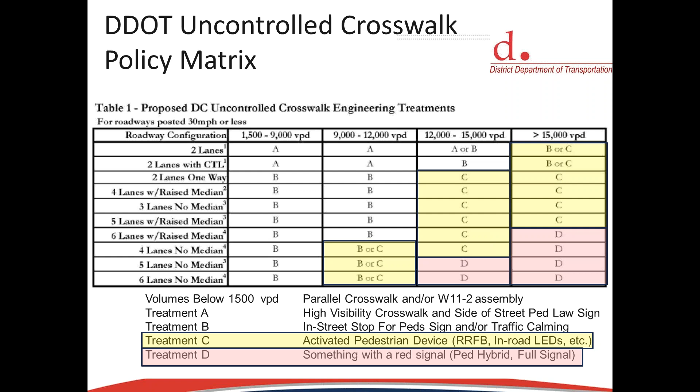It's the middle ground where I think the RFB is quite useful when you don't quite have as much volume. We do have some RFBs on some roads around 17,000 ADT, and we've gotten some good results. We have some RFBs on roadways with 10 to 11,000 with less good results, based on actual step-out surveys, so it's interesting.

So our PED master plan used the Zegeer study criteria for compliant, possibly compliant, not compliant. We overlaid that onto our roadway network and the ADTs and number of lanes. And so every red line there is a place where you do not want to have a marked crosswalk alone.

However, on that red network, I have an intern working on this right now, and her first cut is about 1,000 intersections with marked uncontrolled crosswalks on that red roadway network. So we have a lot of work to do.

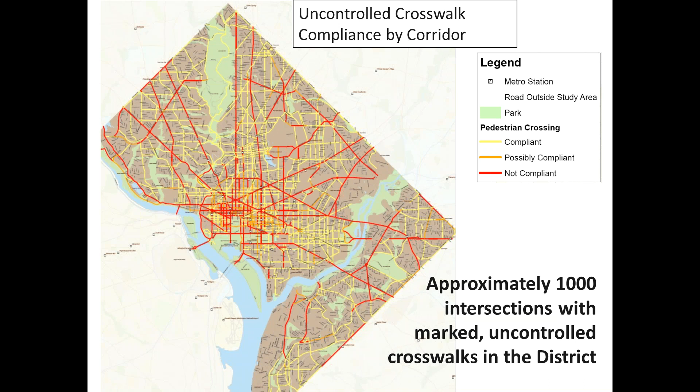We just installed our 17th or 18th pedestrian hybrid beacon. So we're just beginning to whittle away at what is a pretty substantial problem of a lot of marked uncontrolled crosswalks on major arterials.

I wanted to focus a bit on the advanced stop line. It's been mentioned as a good countermeasure in conjunction with other things or on its own. I think the idea of having it on its own is great because it's extremely inexpensive compared with even an RFB, which is not bad at maybe $30,000 to $40,000, or a PED hybrid beacon, which in the district is upwards of $200,000. But we tested the advanced stop lines at a location where we did install a rapid flashing beacon in 2008.

On the northbound approach we put it 30 feet back. On the southbound, because of a driveway to a church, we put it at about 50 feet back. And then we also added, as you can see, a solid lane line on the 30-foot setback side, and then because of the driveway entrance, we used skips on the southbound approach.

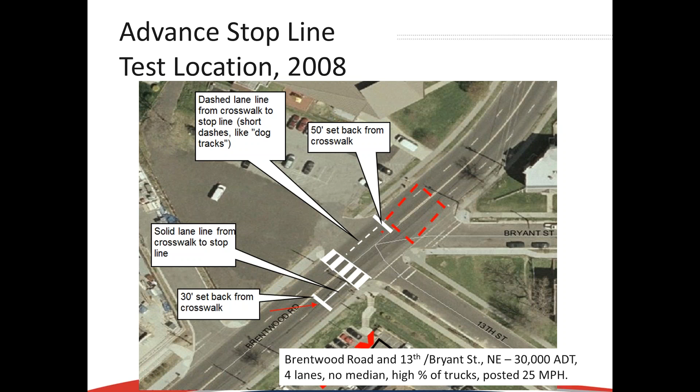It's a little hard to see in this picture of the intersection with the RFB installed, and the arrows pointing at that stop line about 30 feet back.

We did a number of step-out surveys, and this protocol, by the way, is from Ron Van Houten, a well-known researcher from Michigan, who sent me his protocol and spreadsheet so we could be consistent with other work that he's done in St. Petersburg on the RFBs.

This is our baseline before the RFB was installed, with no other enhancements except a raised, high-vis crosswalk and a PED pylon sign. And we got, as you can see, overall compliance about 26% of drivers stopping.

But the key here is that we were trying to measure the distance that cars yielded from the crosswalk, so we used flags stuck in the ground just behind the curb, going back from the crosswalk each direction, one at 10 feet, 20, 30, 50, 70, and 100. And then we measured that each time cars stopped.

We not only measured whether they stopped or not, but where they stopped. And so you can see that almost 30% of drivers are stopping between 10 and 20 feet. Only 41% were yielding further than 30 feet.

And then maybe even more critically, the issue of a multiple threat is captured by this particular column, which is driver passed a stopped vehicle or attempted to pass a stopped vehicle. So in one set of crossings, we had 11 vehicles attempt to pass a vehicle that had stopped for the pedestrian.

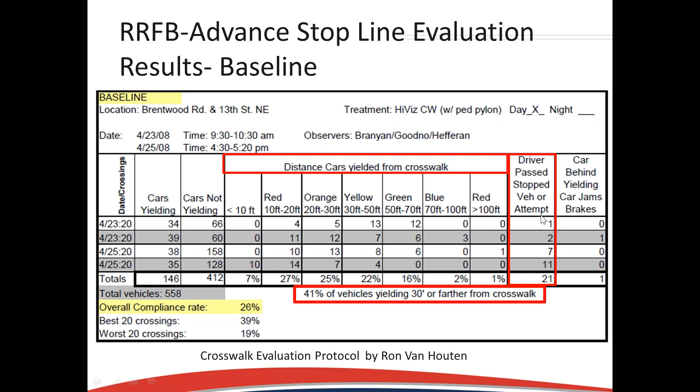So this is important data to capture, because when we went back for the 100-day follow-up, we did 7 days, 30 days, 100 days, 6 months, and then again a year, and our yielding rates were fairly consistent.

So overall compliance rate at this location went up to 78%, but for our purposes, thinking about the multiple threat crash and the usefulness of advanced stop lines, we see that we ended up with 74% of vehicles yielding 30 feet or further from the crosswalk. So this made a believer out of me on this relatively easy treatment.

You see 1% stopped less than 10 feet, 5% less than 20 feet, 17% less than 30, and then you get this big number of people stopping much further away. And maybe more critically, the number of drivers who tried to pass a stopped vehicle was at 2, which was really good. So this was really important research to show that this simple and easy countermeasure for a multi-lane approach to a marked crosswalk can work.

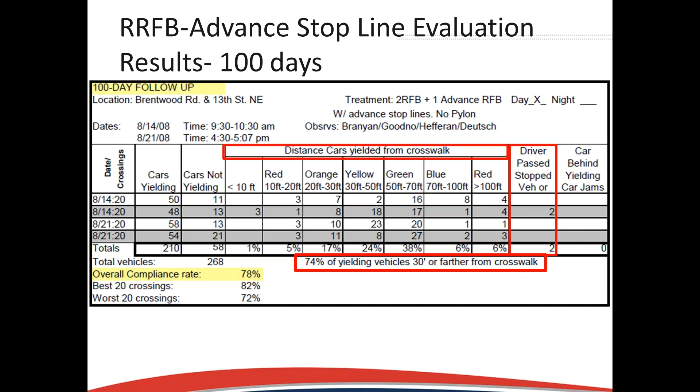Some other approaches we look at in the district include a number of things, but a good thing to do is again have some speed enforcement, because as Mike Cynecki said, the likelihood of people stopping for pedestrians or being more cautious approaching a crosswalk is much less when they're going faster. So whether you can get automated speed enforcement like we have in the district, or get your cops to do good old-fashioned manual speed enforcement, try to pull the speeds down.

Lighting has been brought up, refuge islands, curb extensions, and then this easy on its own - I think it's good to go with advanced stop lines. But once you move to something even more powerful, there are the more substantial countermeasures for multi-lane approaches, such as PED hybrid beacons, RRFBs, and combined with stop lines.

And then I think, and this has been brought up a bit, the best thing to do is try to eliminate multi-lane crosswalks, multi-lane crossings. So road diets, reconfigurations.

We have done a few and have more planned in the district where we're reducing the number of lanes. These are not easy projects. These are big projects, take a lot of analysis and a lot of work. But even if you can go from 6 to 4, it's not as good as going from 4 to 2. But if you can go from 6 to 4, there's an opportunity to just reduce the opportunity for the multi-threat crash.

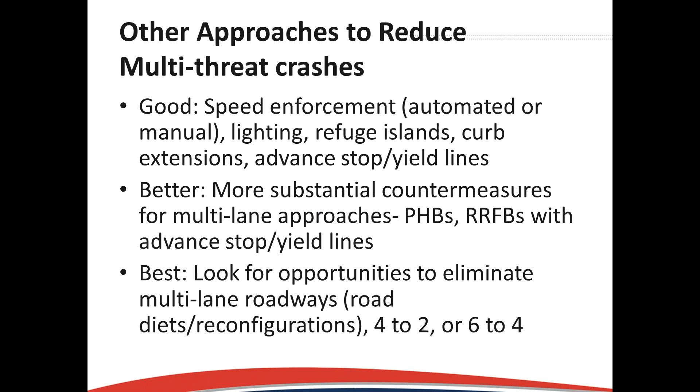So then you've got 3 lanes in one direction, and in one case, Bladensburg Road, for those who know the district, it's got a whole lot of uncontrolled crosswalks that are marked because of the offset intersections. So it's one of those situations where I think we could really reduce the chance of a multi-threat ped crash in an uncontrolled crosswalk if we could just reduce it from 3 lanes to 2 lanes.

All right, so that finishes up my presentation.

Thanks so much, George. We're going to jump right into Q&A, and I'm actually going to keep things right where you are, because something you said at the end of your statement got at one of the questions we had. We heard a few things from some of the earlier panelists about congestion and heavy volumes. Clearly, one of the risk factors we see in the STEP guide - we heard Mike talk about congestion, traffic - as being a major risk for the multiple threat crash and other crashes involving pedestrians. So are we considering a countermeasure possibly as being getting those ADTs down, maybe reducing the number of vehicles at some of these locations? That's a pretty radical idea in some parts, but I wonder what you and DC think about that.

That's a good question. I mean, I think that's certainly a really ideal way to deal with it. It's just, people will say there's congestion here, and we'll say, well, there's just too many cars here. That's the main problem.

And we just did a massive highway project in the district where we built 3 new bridges over the Anacostia River, and now have a freeway connection from 295 coming down into the district on the east side of the Anacostia, going over, connecting to 395, 695. So you can go all the way through, down and through the district, and you used to have to get off and go through some more local streets or do some other strange things. It was supposed to pull traffic off of some of the commuter routes that people were using, East Capitol Street, C Street, and actually it didn't.